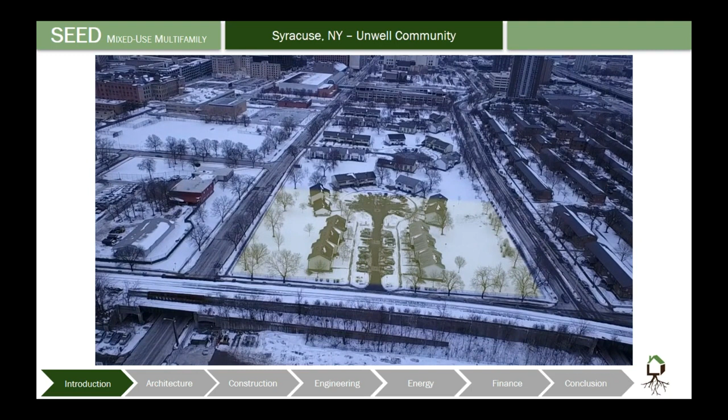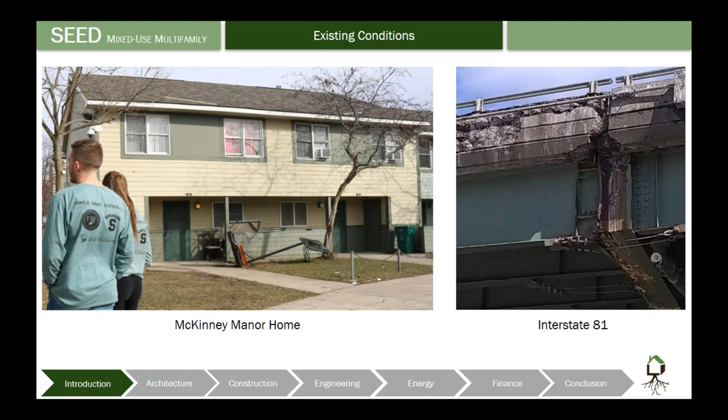I've lived in Syracuse my entire life, and it's sad to watch the city we grew up in degrade like this. Like Interstate 81, the houses on this lot are crumbling. They're falling apart, they're an inefficient use of space, and they have mold and moisture issues. Most importantly, as climate change becomes more prevalent a problem, will these houses even be resilient enough to withstand these extreme weather conditions?

You know what though? All hope isn't lost, right? Syracuse realizes this and is going through 3 major transformations totaling over $2.2 billion, making Syracuse one of the largest investment zones in the entire state of New York.

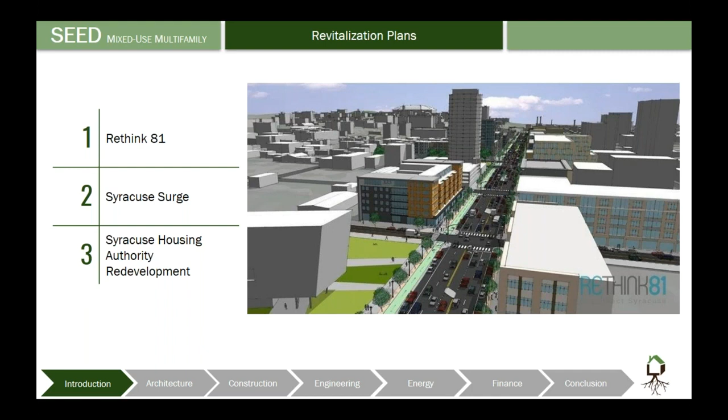The first transformation is Rethink 81. This plan is to take this raised highway that has historically divided this great city and turn it into a booming downtown boulevard, spurring new economic opportunities and dismantling the socioeconomic divide.

Revitalization Plan 2 is Mayor Ben Walsh's plan called the Syracuse Surge. He plans to invest $100 million into the East Adams Street neighborhood, improving education and public housing. When we met with Mayor Ben Walsh, he told us how our design fits into the future of Syracuse and how we can further the initiative.

Transformation 3 involves our building owner, Syracuse Housing Authority. Next month, they plan on bringing a master developer to redevelop all this land highlighted in yellow. Outlined in their transformation plan, they plan to take McKinney Manor, which is this lot right here, and parcel it into 3 properties, starting with 101 Latimer Terrace.

Also outlined in the plan is a mixed-use, multi-family building that's energy efficient. Now, with this building being in the center of all these redevelopments, we believe we're bringing in this seed when the soil is most fertile.

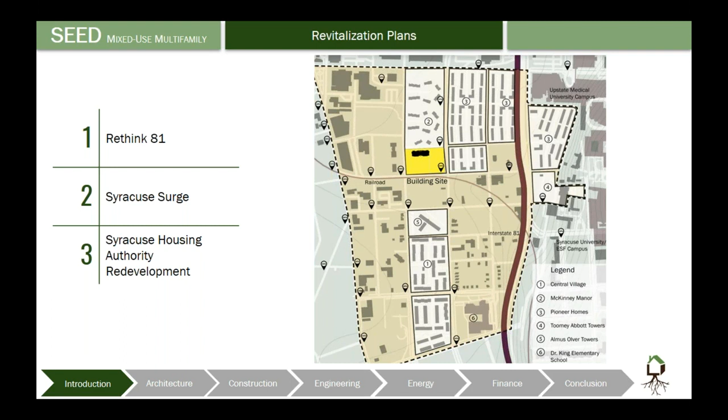We are here today to represent a team of 22 individuals from both Syracuse University and SUNY ESF, student-led and multidisciplinary across the board. We met with our various industry partners over time, but we especially met with Syracuse Housing Authority bi-weekly, as they are the current owners of our building lot and will be the managers of our building SEED. They helped us with various operations and maintenance problems, and helped us create an innovative yet practical building for the area of Syracuse.

We asked ourselves: does this design lead to net zero energy? Does it promote a healthy lifestyle? How affordable is this option? How resilient can this option be? How easily operated and maintained is this decision? And lastly, how easily replicable can this option be?

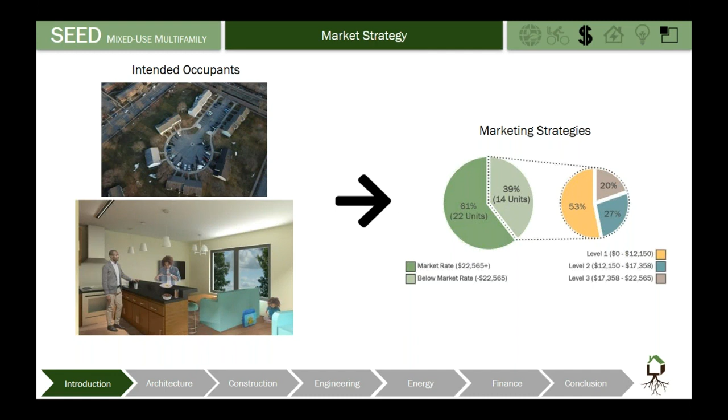Because the Syracuse Housing Authority master developer could take these floor plans and easily manipulate them, they could change the amount of floors, they could change the shape, they could change the function of the commercial space. This is a very unique floor plan that allows the Syracuse Housing Authority master developer some wiggle room.

So as Noah was saying, we developed a lower lot in McKinney Manor. With this, we really tailored the site to promote active design for the residents as well as for the commercial space. So this is why we include key elements such as gathering spaces, a community garden, as well as a playground for the commercial space.

With this, you'll also notice a rain garden on the southwest corner of our lot. This is not only for aesthetic value, but also to limit discharge into Syracuse's outdated combined sewer system. So this sewer system essentially takes urban runoff and sewer in times of high flow and discharges it into Onondaga Lake. This lake was actually named America's most polluted lake back in 2012.

And Syracuse, after realizing this was to be an issue, as well as Onondaga County, and after spending $1 billion on revitalization, has begun the program named Save the Rain. So this program uses innovative green infrastructure approaches to combat this urban runoff, and actually won the U.S. Water Prize back in 2013.

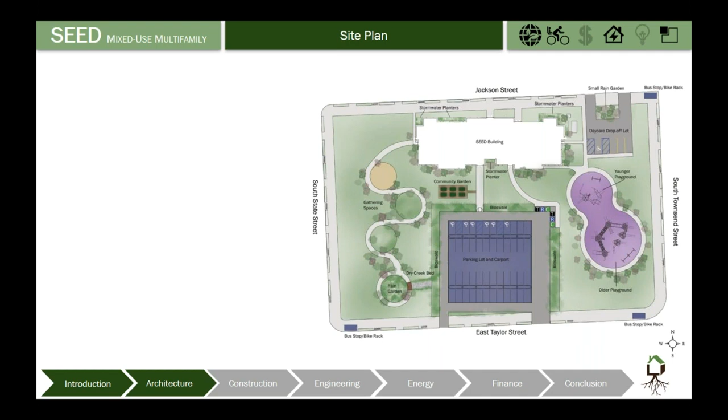To continue with their initiatives, we also sited bioswales along the outline of the parking lot, stormwater planters along the outline of the building, as well as porous pavement and natural vegetation to limit irrigation. With this, all these practices are sized to handle the 90th percentile storm in Syracuse, which is about 1 inch.

But to provide resilience to these structures, we fitted each with an overflow valve, which will transport 100% of excess stormwater in times of high flow and discharge and store it in a stormwater retention basin located under the parking lot. This will limit the discharge into the combined sewer in times of high flow and help with the revitalization of Onondaga Lake.

Not only does the site serve a function, but it also serves a purpose. The current McKinney Manor has luscious green space, which is something that's really missing from Syracuse, so we really wanted to accentuate that. McKinney Manor is fenced off from the remaining community and doesn't allow anyone else who doesn't live there to use it. We wanted our lot to act as a unifying principle for the neighborhood, someplace where everyone can come and gather and boost morale and camaraderie.

So we implemented rain gardens, pergolas. I mean, come on, who wouldn't want to read our progress report underneath that umbrella?

So our building consists of 5 stories and roughly 57,000 square feet. The design of our building started with the concept of modularity. We didn't intend to create one perfect unit, but rather an energy efficient unit which could be easily expanded and replicated throughout the East Adams Street district.

The 1 and 2 bedroom units converge to define the interior and exterior of our building. This concept of modularity allowed us to avoid long continuous hallways, similar to the infamous hallways in the Shining. Not only that, but they created an alcove, a prime location for bike storage, which is an intended primary mode of transportation for our residents.

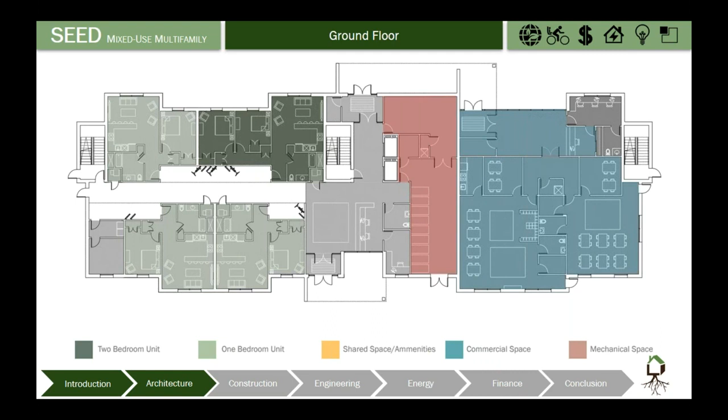Richie left me on a bit of a cliffhanger. So what is the commercial space? Although the competition didn't really require us to pick a function for the commercial space, the need for well-kept, affordable, trustworthy childcare is at an all-time high in the East Adams Street neighborhood. Over 75% of the families living in this area are raised by a single parent.

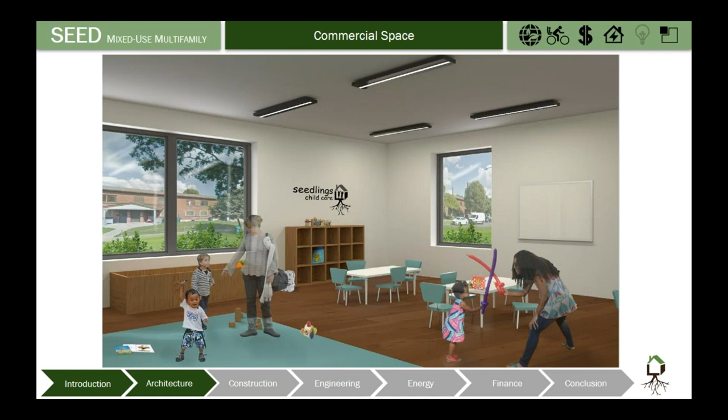Not only does this daycare meet the New York State daycare requirements, but it also goes above and beyond that by employing a Harvard study. This Harvard study said that an optimal indoor environment affects the cognitive ability of the children positively. So we made sure to think about all the little things, like compartmentalized wall assemblies to keep the noise down, an abundant amount of lighting for reading, MERV 13 filters with all the ventilation equipment, and a playground facility to promote an active design. So you may be curious as to how this building will be constructed.

Our wall materiality begins with the concept of off-site and panelized construction. Beginning with the foundation stem walls and first floor walls, these will be constructed out of insulated concrete forms. This will be reinforced with an innovative product known as Helix Micro Rebar, which adds to the three-dimensional strength of the concrete. Beyond this, our upper floor walls are constructed out of 2x6s with both cavity insulation and exterior rigid insulation.

Sandwiched between these 2 layers is a zip sheathing layer, which acts as our primary air barrier as well as moisture barrier. Beyond this, we conducted dew point calculations to ensure that condensation would not build within our wall cavities, which is a detrimental issue in high-performance buildings.

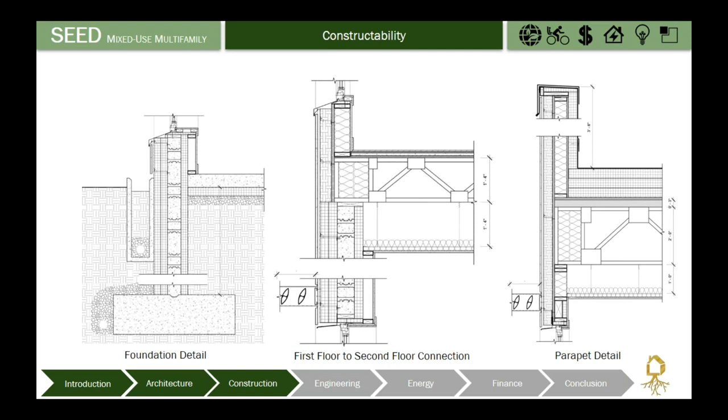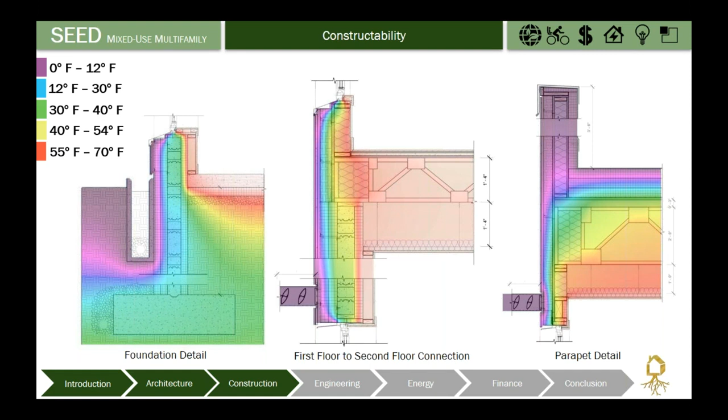Beyond this, we use THERM, a 2-dimensional heat flow analysis, to identify the weakest point within our building's thermal envelope. That point is actually located right here, where the insulated concrete forms meet the upper floor walls. We're capable of identifying the temperature at this point, and once again, ensuring that condensation will not build within this wall cavity.

As I had mentioned, the zip sheathing layer, shown in the green line here, acts as our primary air sealing approach for the entire building's air tightness. But there is a need for compartmentalizing our wall assemblies between apartments to control contaminants.

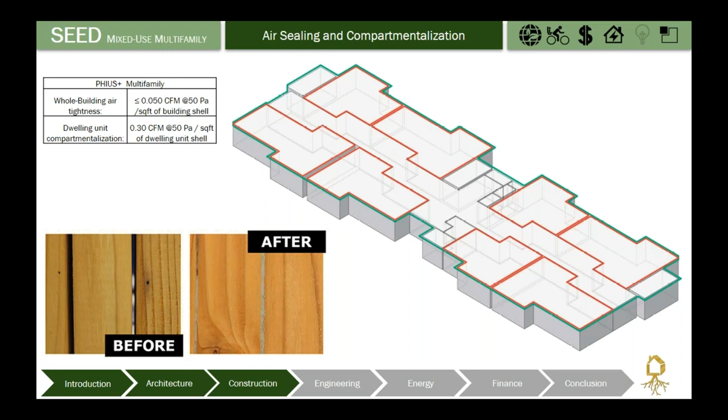In order to tackle this notoriously difficult task of manual air sealing, we've implemented an innovative solution known as Aero Barrier. Aero Barrier is an aerosolized solution which is misted into the apartment while the apartment is pressurized. The pressure is forced through with a blower door, and the pressure forces these particles into the small cracks and leaks within the building envelope and seals them up. As seen in this image, it's capable of sealing gaps from a 1/2 inch all the way down to 10 microns, which is smaller than a human hair.

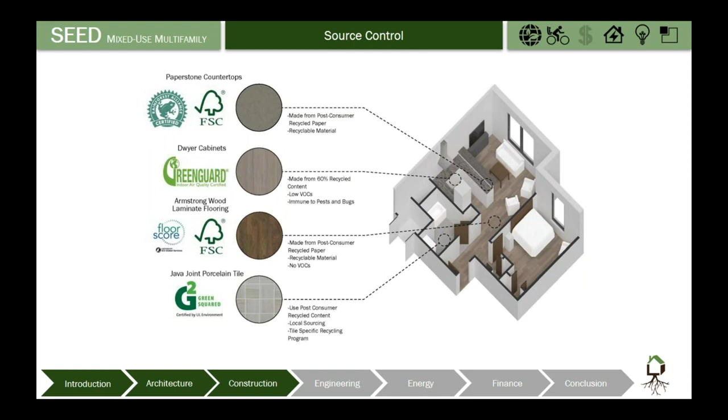In addition to compartmentalization, we also use source control when picking all of our interior finishes, materials, and products. We wanted to make sure they had a low volatile organic compound content to promote a healthy lifestyle within our building, as well as maintain optimal indoor air quality for our residents.

Continuing with the idea of indoor air quality, we decided to utilize a continuous and balanced ventilation system within our building. We utilize the 7 vertical shafts shown here in this isometric view going up to a central rooftop unit, making this a centralized ventilation system.

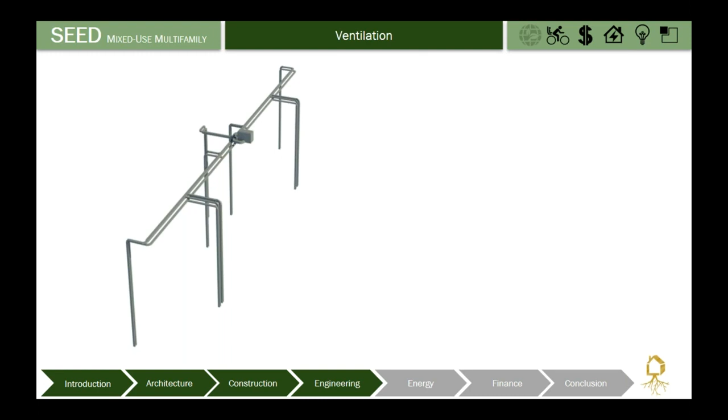We chose centralized because after looking into decentralized, it would put over 72 penetrations in our building's envelope. With this, we only put 2 in the roof. So this air is coming up from the residential units as well as the common spaces to the central unit on the roof known as the RenewAire HE Series ERV.

With this, we also employ a separate ventilation system for the commercial space, which would be the CERV ERV. This system is very innovative as it gives the operator real-time monitoring of the VOC and CO2 concentrations within childcare, so that way we can ensure a very high standard of indoor air quality for the commercial space.

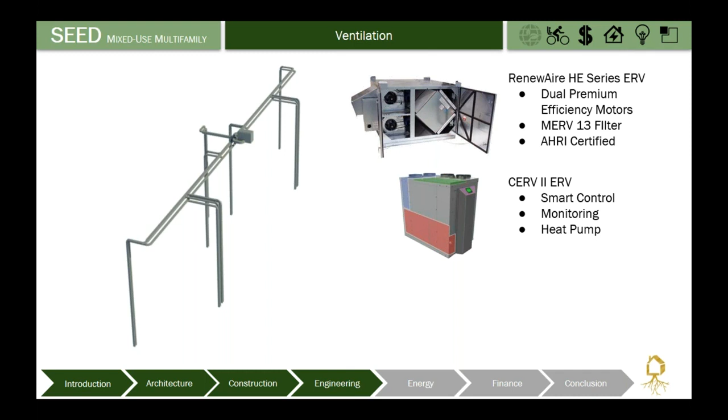With this, we will also be using an innovative approach similar to Aero Barrier, called AeroSeal, which is the same process but within these long duct runs. This limits air leakage in the long duct runs using an extremely low VOC concentrate material. With this process, we also expect to see results 25 to 30 years out upon completion.

So moving on to how each unit will be heated and cooled. We actually supply air to the heat pump for each unit from the ERV. This means that our units will be heated using a decentralized system design.

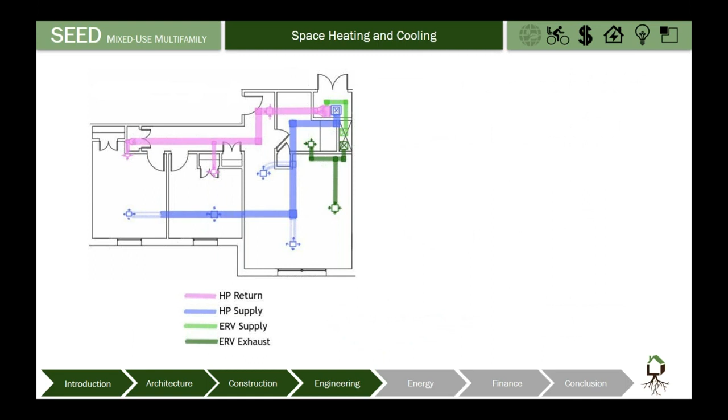With this, we're using the Daikin SmartSource water to air heat pump with a size 3/4 to 1 ton, using an innovative energy modeling software, which Mike will discuss later.

With this, we also make sure we have proper space allocations for the unit in case of accessibility for maintenance staff. We also locate the unit outside of the residence unit, so that it's accessible through the hallways, so that maintenance staff does not have to go into the unit to access the system.

With this, we also supply air to areas we expect heat loss throughout the building envelope, so that's near the windows, and also supplemental returns within the unit, making sure we're not pressurizing any point within the unit.

This will all be supplied by the on-site geothermal system. This will consist of 400-foot vertical wells, which will be pumped through with a glycol mixture to a central manifold in the first floor maintenance room.

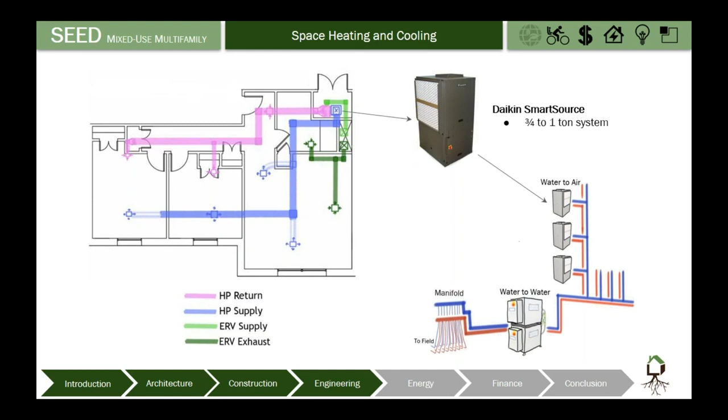From there, it will be distributed to a decentralized design of our heating and cooling, and then to our water heat pump allocated for domestic hot water production.

We decided to utilize a centralized domestic hot water production after looking into the idea of decentralized. To accommodate a decentralized design of this domestic hot water production, it would upsize our heat pumps in each unit to 2.5 tons to accommodate a desuperheater.

Realizing that upsizing of equipment in these decentralized designs is a common industry problem, we went back to a centralized design and utilized the vertical shaft within the building.

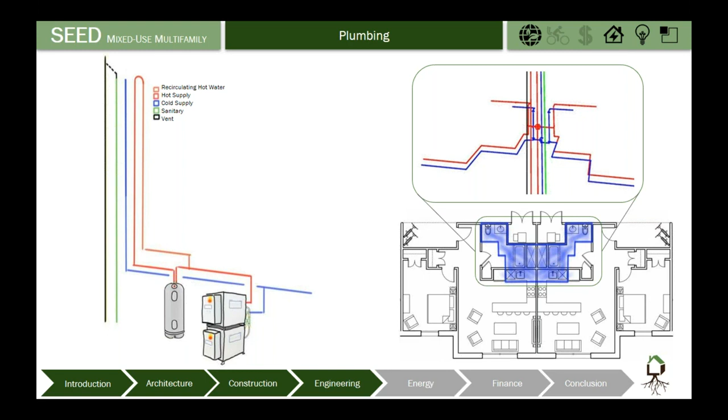Once it gets to each unit, we limit to a tight water core set forth by the DOE Zero Energy Ready Home guidelines. At the end of each branch, we place WaterSense fixtures, reducing our water consumption in the building by 47.5% from LEED baseline.

Any MEP design is not complete without looking at the lighting within the unit. To do this, we utilized a Grasshopper DIVA simulation software, which really optimized the daylighting within the unit, so that we can limit artificial lighting.

So let's mess with the window to wall ratio for each unit, making sure that we're getting optimal daylighting. And it gave us a 19% window to wall ratio.

With this, we also use sensored occupancy zone lighting systems in the hallways, which dims the light down to 20% after 5 minutes of non-occupancy, giving the building owner 73% savings from traditional T8 lighting systems.

One of the hardest, almost impossible variables to calculate in a high efficiency building is the building occupancy behavior. You never know how many showers the residents are going to take or what they're going to set the thermostat at. In order to combat this issue, SEED will employ techniques of demand-side management, a building automation system, energy meters, and an interactive in-home display as a comprehensive strategy to reduce our energy use.

In order to convey all this information to the residents, we will be using the Siemens in-home display unit. This will convey valuable information to the residents, such as how their actions are impacting the building's efficiency, their energy usage, and their monthly energy bills.

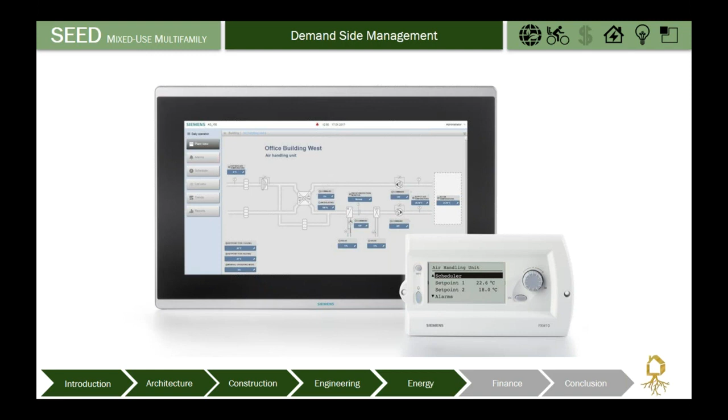Although we understand this may be a little intimidating to some of the residents, we've constructed a comprehensive demand-side management manual. We also understand that not everyone is interested in reading the lengthy manual, so we will hold monthly meetings in our common spaces that will educate the residents on how they can live a more eco-friendly and green lifestyle.

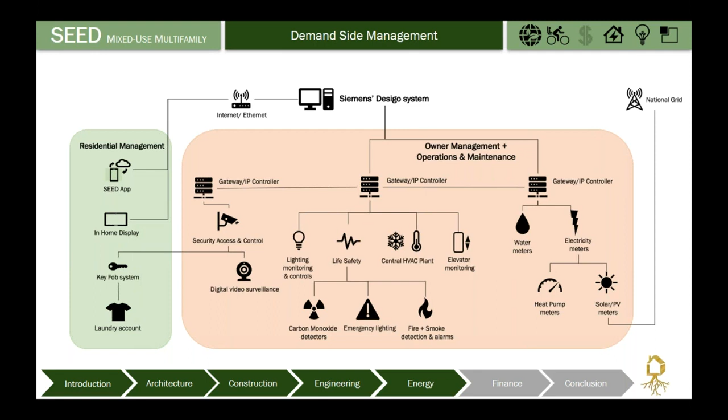In order to optimize our connection to the grid, we'll be working directly with National Grid and participating in their net metering service through the use of our bidirectional meters. This will allow SEED to function as an independent systems operator and sell our renewable energy produced on site through the state transmission services for 10 cents per kilowatt hour.

Since this competition is the Solar Decathlon, how do we not have renewable solar energy on our site? On our roof, we have a 68.7 kilowatt mounted roof array. These panels will be mounted at 30 degrees and produce roughly 80,000 kilowatt hours of energy per year.

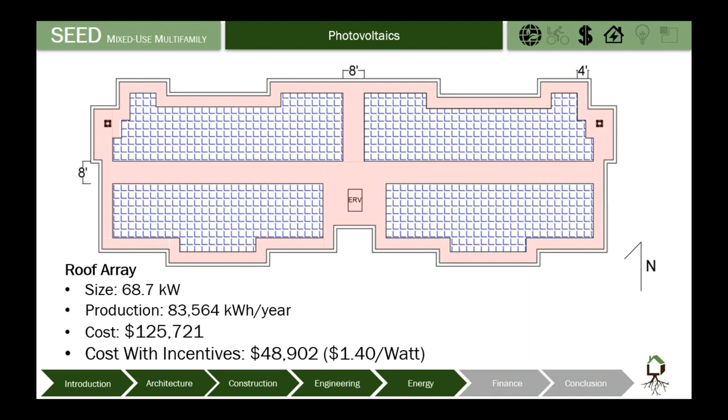Not only did we look deep into the design and setup of this roof array, but we considered New York State fire code heavily. There will be a 4-foot pathway around the perimeter of the array and 8-foot pathways through the center to ensure first responders have proper access to the roof, properly ventilate, and fight fire.

On the south side of our site, we have a 200 kilowatt solar carport. The structure will be the SunPower Longspan and Blue Ridge solar carport. We opted for this because it allowed us to have an adjusted angle of 30 degrees and optimize our production. This carport will produce roughly 250,000 kilowatt hours of energy per year.

Not only that, it will collect 280,000 gallons of water per year, roughly half the size of an Olympic swimming pool. This water collected from the carport can then be discharged into the rain garden, as discussed before.

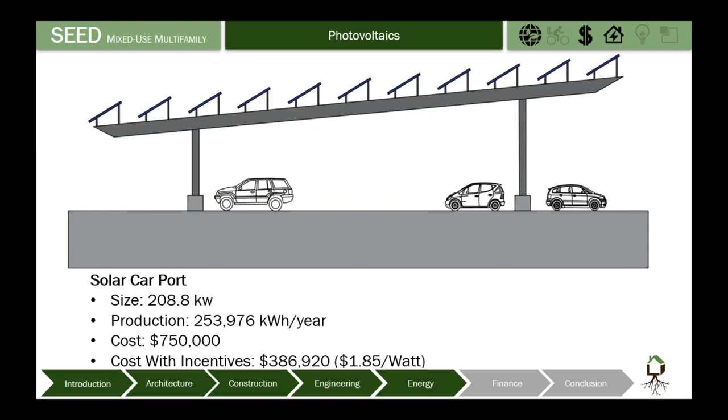Together, these systems will produce roughly 335,000 kilowatt hours of energy per year, thanks to the panel we use. We use the SunPower E-Series panel, which has an efficiency of 20%. Not only that, but it is cradle-to-cradle certified, a notable achievement in the solar industry. This ensures that the contents of the panel will be properly recycled once they extend their lifetime.

So to identify the total building's energy consumption, we used a brand new energy modeling software known as Trace 3D Plus. Trace is built off of the DOE Energy Plus simulation software in conjunction with Trace's load sizing and equipment sizing capabilities. We're capable of outputting a source EUI of 33.6 kBTUs per square foot.

Now this far surpasses the guidelines set forth by the Department of Energy, which was 80 kBTUs per square foot, and further reduced our energy consumption past the Passive House Plus 2018 guidelines. This is a new standard set by Passive House Institute US to reduce energy consumption near net zero.

Beyond this, we used REM Rate to identify several things about our energy consumption. We really wanted to drill our energy consumption down to a unit by unit basis. Using REM Rate allowed us to do a multitude of things, but primarily we plotted a HERS index, as shown here, at -7.5. Beyond this, REM Rate also allows us to ensure compliance with Energy Code, compliance with Energy Star, and compliance with the Department of Energy Zero Energy Ready Homes guidelines.

Well, all these energy efficiency features come at a cost. So to identify this cost, we constructed a CSI Master Format estimate, which totaled $9.1 million. This includes all items that a developer could expect to pay for the entire redevelopment of this lot.

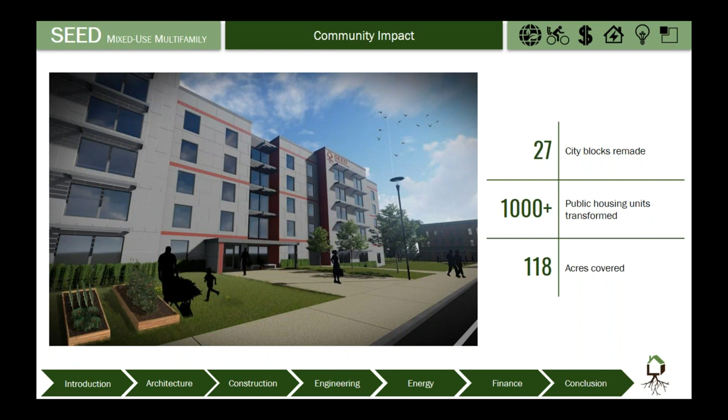Yeah, just a quick one - that's a very impressive presentation, I'm blown away. Just one quick question though: did you have any chance to compare your construction cost, either on a per square foot basis or as a percentage, relative to a minimum code compliant building?

Yes, that's exactly what we did. We constructed essentially two estimates: one for just a baseline, our building to code with none of the energy efficient features, using similar systems. Then we compared that to our total construction cost. As I mentioned briefly, the code-constructed building cost about $7.7 million, while our building was at $9.1 million. We were capable of reducing that through incentives, tax credits, loans, and rebates to drop it down to $7.7 million - so it went from 9.1 to 7.7.

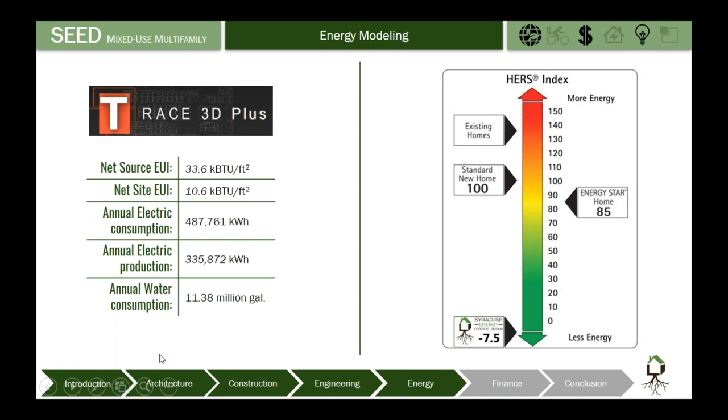Vinny and I deal with reality and maintainability of the buildings, and we usually have to deal with the aftermath of great ideas, but not really the end result that everybody thought would be. So a lot of times we're replacing those

Energy Star refrigerators because motors burn out, were fire hazards, and at what cost? All that stuff is the type of things we've experienced over the last 15, 20 years.

He's a mad scientist. He can pick apart electrical and mechanical design pretty good, but we're doing it on the fly with you guys.

But when you get into the development of this, there are going to be some stark realities. Your cost is going to increase because you're going to have mandates. You're going to have MWBE, Section 3 disadvantaged business.

You're going to have job training programs. These extend cost, extend construction schedule. So best laid plans of mice and men eventually do come up to the realities.

I don't know how many other representatives of the city are here, but that's where it starts, that Blueprint 15 group, the Allyn Foundation, which is heavily involved in it. So just keep it going and learn.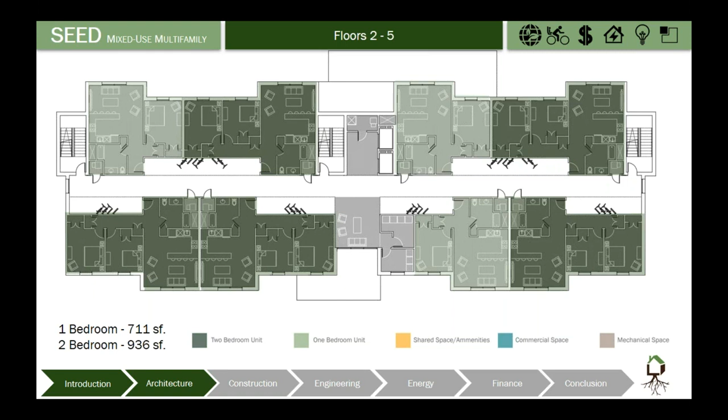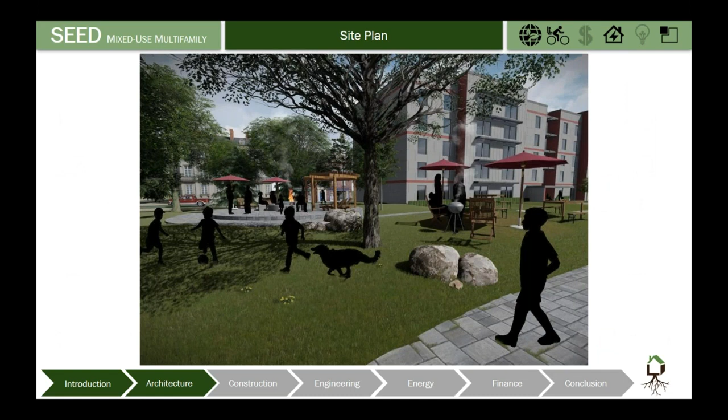Quick question on the exterior of the building. Maybe you said this and it slipped by me, but I couldn't tell. Do you require each module be south-facing? Because it could look like in one of your orientations there, one of your aerial views, some buildings are blocking the next building over, so you actually wouldn't get much sunlight. Did I catch that? Is that correct or incorrect?

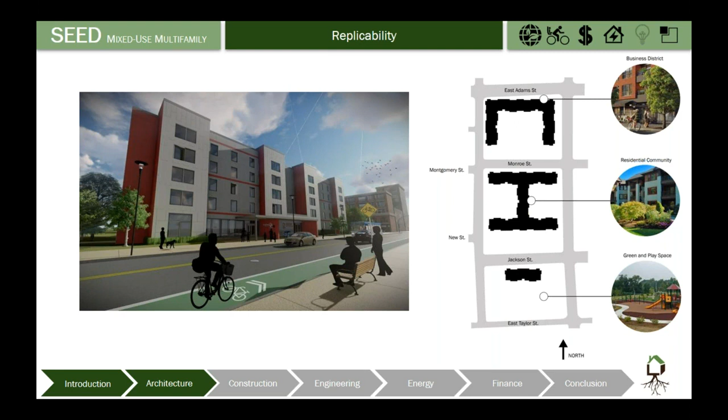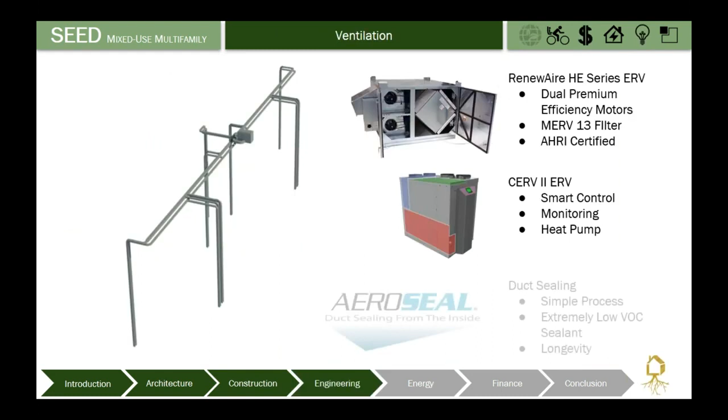Is this presentation available to look at through the web for people who couldn't make it here? It is now, we just recorded it. Oh, great.

Yeah, we signed away our rights. So if you were to search the solar decathlon live stream today, you can go find it online. All of the winning projects are up there. They have the presentations, they have final reports up there. So you can look at and compare other projects.

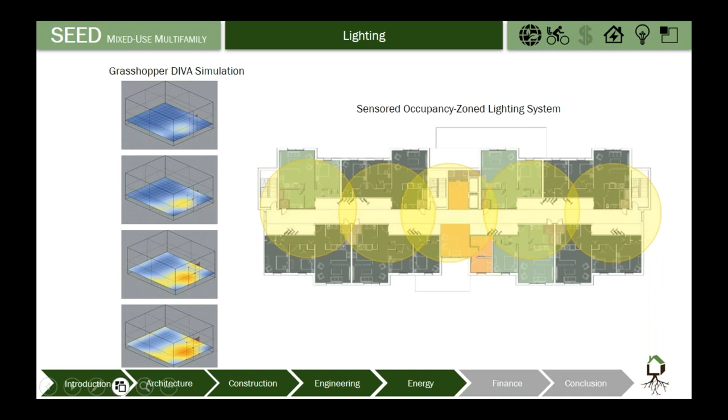So I told the students that as we finished up, I thought it would be appropriate to take this moment with all of you here to explore the opportunities that I think we're presented with right now in Syracuse. And I'll just explain briefly.

Five years ago, the DOE started this competition, and we had an equally passionate group of students. The size was a lot smaller, but again, they worked hard, nobody killed anyone, and they went out and won the grand prize for a single family home. So they entered that category that year.

Today, basically five years later, that home has finally been built, called the Montage. We had proposed it here in Syracuse.

We had a lot of discussion at the time. As projects go, things change. It ended up becoming part of a youth training program in the city of Schenectady, and has been constructed there. Just last month, I was able to send out an email to team members who've gone out over the last five years, sharing this news with them.

These folks challenged themselves to do a project here in Syracuse along these same lines. Like that project, I'm sure things will change, but we had a discussion when we won last time about how to move this forward, and I thought it would be nice to segue into that now.